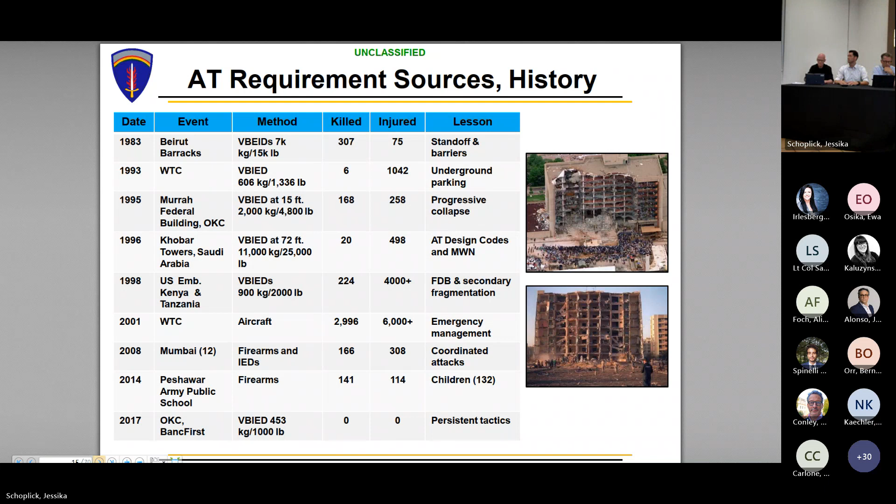Next slide, please. This is then an evolution—first of all, the minimum standards for AT is UFC 4-010-01. Its intent is simply to reduce mass casualties, or minimize the likelihood of a mass casualty event. It's also to standardize the process of identifying what are threats and what are appropriate levels of protection, so that it's standardized across DoD—not subjective to this person and their idea, or that person's idea—to standardize it and make it more economical and effective, not just subject to whoever is involved in the design at that time.

So there's been a long history of this standard since it first came out, starting around 1999, the first kind of version of them. But the big thing we've seen changing throughout is standoff distance.

At first it was just a blanket 25 meters and 45 meters. Some people still remember that or still even think that's the case. But then they changed the standoff distance. For people unfamiliar, standoff distance is the space you need from your building to any roadways or parking, because cars are an easy way to carry very large bombs that can do significant damage to buildings and the people inside.

So standoff distance is a big thing of these standards. It went from the 25-45 blanket requirement to then account for the fact a reinforced concrete wall is stronger than unreinforced masonry, so then accounting for standoff distance based upon your construction material.

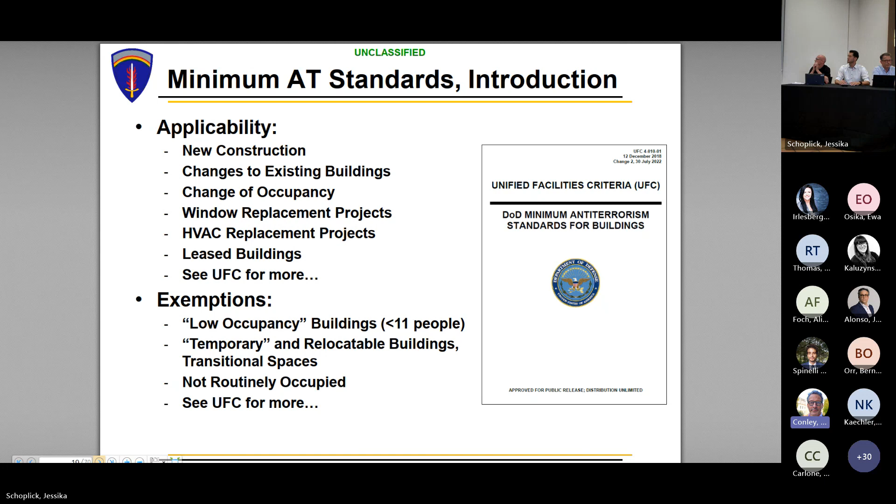But the first step in all this is once you determine that these AT standards are applicable, you have to do a design basis threat. That is from UFC 4-020-01. This is a process I'll cover very briefly later, but basically establishes what are the assets, how important are they, and what are the threats, and how likely are they to attack. So every project that has AT equities, you have to do this.

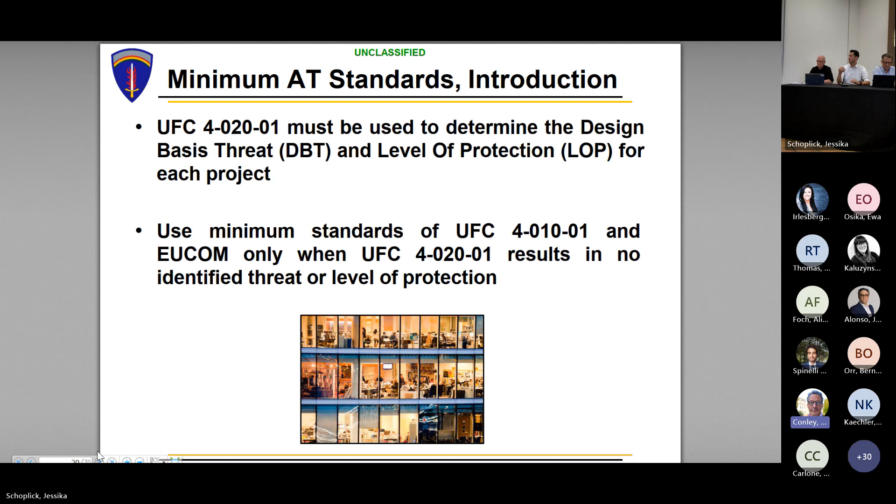If you go through this process and the asset value is very low or the aggressor likelihood is very low, there's a set quantified value for that, but if it's very low, then you don't have to do any special considerations - you just apply the minimum standards. And that's what I'm covering today, those minimum standards. But you always have to first do the design basis threat, and then if it's the minimum standards, that's what you use.

So I wasn't sure whether to present this, but since so many of us were familiar with the old minimum AT standards related to standoff, I think it was maybe valuable to show what actually changed, since we're still living with the impact. Basically, as we said, it eliminated VBID as a minimum threat scenario. The idea was that if a building was actually going to be targeted, then it would be captured in that design basis threat process if it was happening properly, and it would be protected.

But if it's a very insignificant building, it's not going to be targeted. So it only needs to protect against collateral damage, like if the more attractive building down the street was being targeted, this building next to it wouldn't receive collateral damage. That's the reason behind it and the impact.

Some other big changes is that progressive collapse, I'll have a slide on it if you don't know it, but it's no longer required for existing buildings. Only new construction for buildings over 2 stories.

And then there's an Appendix B and C here. Basically that's taking all the content that used to be there for how to do standoff distance, how to make windows and doors that protect against the blast event. All that content is still in the UFC, it's just moved from the minimum standards to those appendixes. And Appendix C has those tables, the standoff tables you might be familiar with - what's the explosive weight, what's the construction material, what is a planning factor for standoff distance.

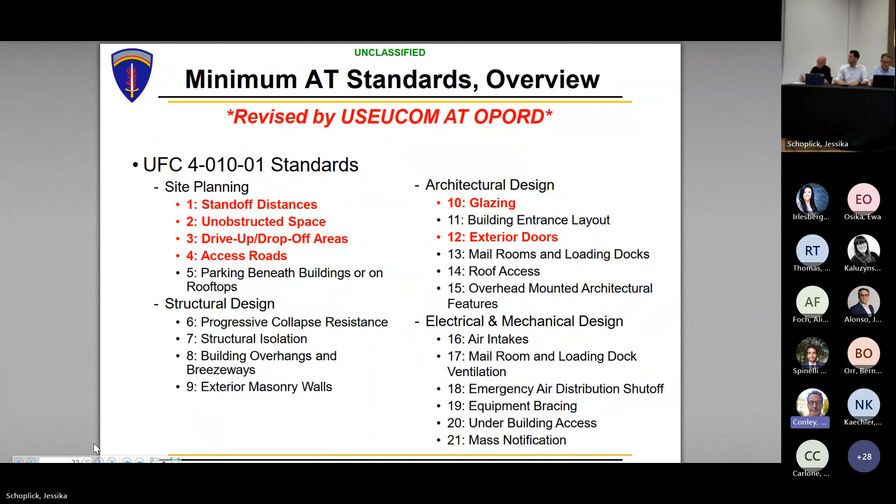Next slide, please. So these are not applicable in Europe, but I'm just showing to show the contrast, the difference. But since the 2018 publication, the UFC alone only requires this basically standoff to be anywhere from 6 meters to 15 meters to your installation perimeter, depending on what's outside that perimeter line, but as little as 6 meters. And pretty much there's no standoff distance required from your buildings to internal roadways or parking. And by internal, I mean within an access controlled installation.

And then there used to be special considerations for if you had an access road, like a DFAC needs to have deliveries coming directly to it, even if that's within standoff. There used to be requirements for how you control that access road. But those restrictions were also then eliminated. Next slide, please.

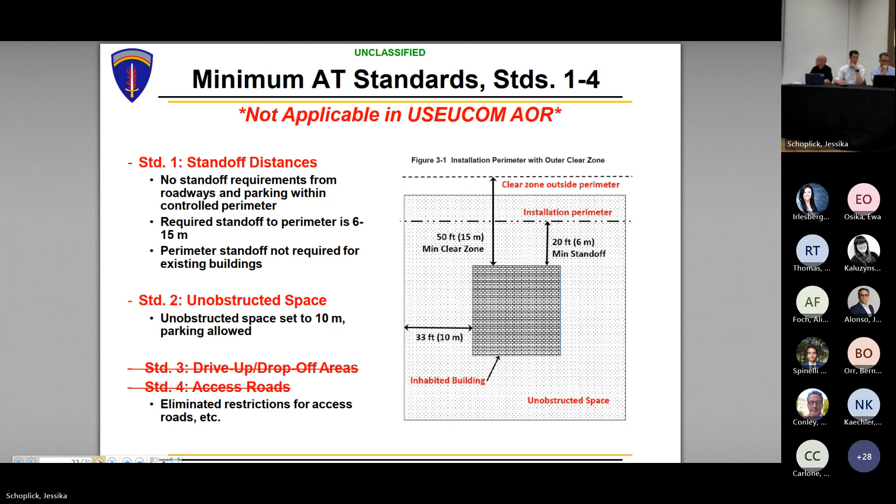It's one off. Okay, so there's a lag. Okay, so then also just like it affected those siting conditions, it also affected some of the materials that protect.

So windows used to have to be specifically designed. With the 2018 change, that just gives a minimum prescription. A 6 millimeter laminated window is enough to give collateral damage protection. If a bomb goes off down the street, your glass will break, but the overpressure there will be so low that just a very small, laminate thin window will reduce some of that flying glass that you see in the bottom left photo. Similar topic for doors - they removed these special design considerations. Next slide.

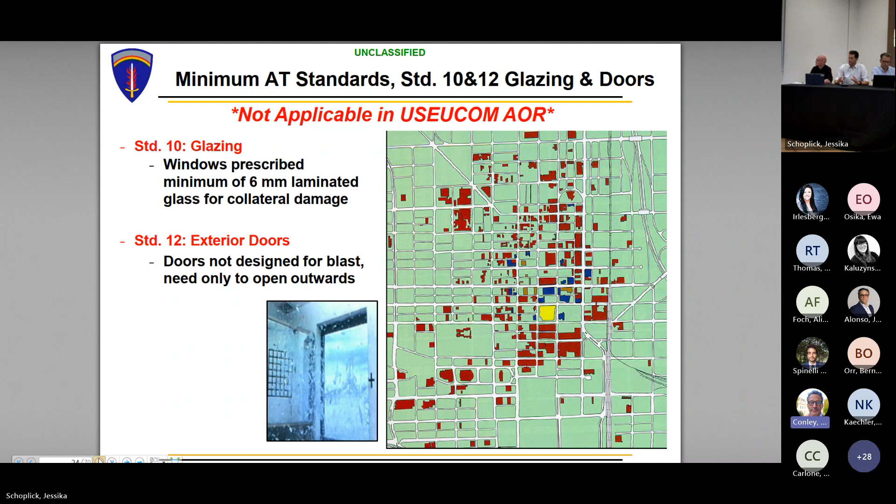Okay, so this is how the EUCOM AT op order modified it. This is just an extract of what's in the op order. I don't want to dwell into it because it's just a lot of boring text. And you see I omitted any explosive weight because it's a bit controlled information. But if you have the need to know and you're working on our projects, we share with you the AT op order and you have those design considerations.

So first of all, the EUCOM AT op order establishes what the threat delivery vehicle is and the size of it, but more importantly, the weight of it, so that if you have barriers, you know what kinetic energy you need to design them to. So it establishes what the weight is, and then it establishes the

explosive weights of that threat. So based upon your access control procedures, how small the thing they're searching for, based upon a building's proximity to the perimeter or to internal roads and parkings, it gives two different explosive weights to design for.

But then the big thing here is designing for that bomb to be either a stationary VBID or moving VBID. Stationary means the person wants to park in a legal parking spot, walk away unnoticed, go on throughout their day, and the VBID goes off and they're unrelated to it. Moving means that if the person has created a VBID, they're happy to give their life or get in trouble in the delivery of it.

They're not going to restrict themselves to legal parking spots. So they will drive up a road that says authorized vehicles only, or they will drive over the curb and get their VBID to their target. So that's the difference between stationary and moving VBID.

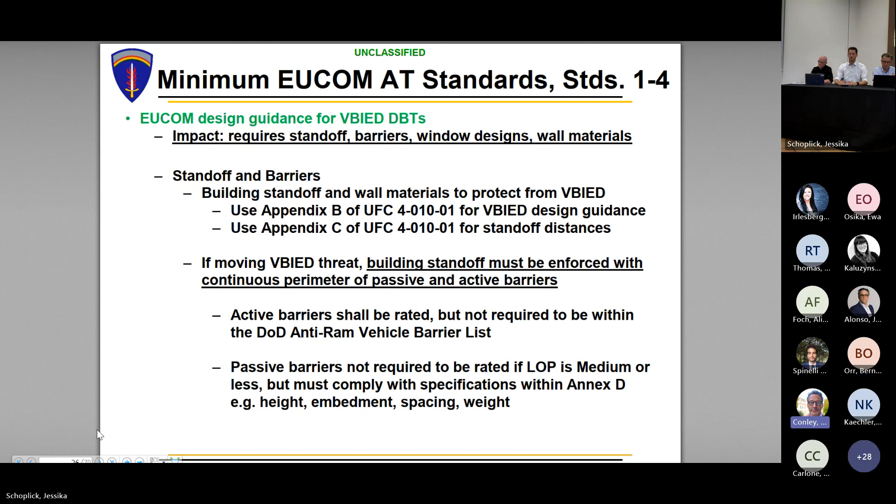They can be rated to the European systems they have here, but they don't need to be on that list. And then the passive barriers, they do not need to be specifically rated. They need to be designed for that expected vehicle and to provide some kind of stopping capability, but they do not need to be certified rated if the building's protection requirement is medium or less. But they must comply with specifications from EUCOM for height, embedment, spacing, or for example weight if you're using things like boulders. Next slide, please.

So 2 different standoff requirements. Your unobstructed space, you can't have any bushes or things where people could conceal IEDs within an area near the building. So that whole distance of your standoff distance to your parking, say it's 16 meters, that's called your unobstructed space, and it needs to be clear of things to hide IEDs.

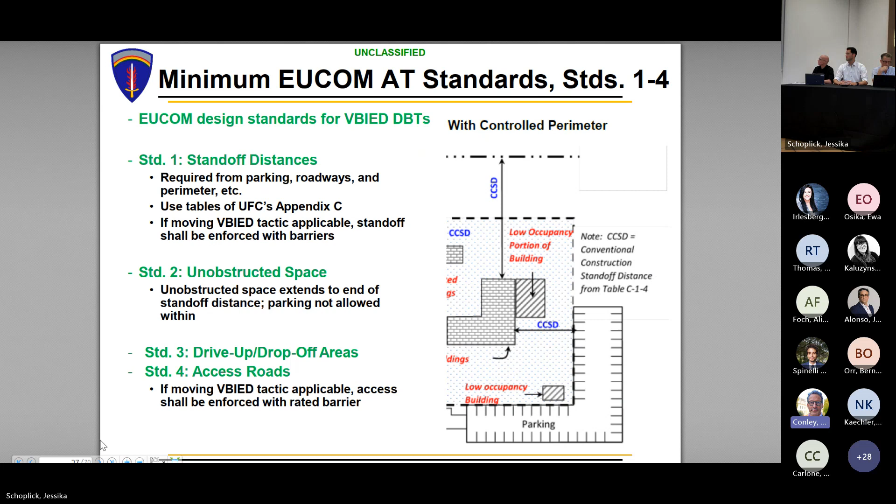And then also, if you have access roads to that building going inside your standoff distance, there are specific requirements - you need to enforce it with barriers, active barriers.

This is showing one of those standoff tables from Appendix C I was mentioning. So as an example, if it's unreinforced European clay masonry, which is common here, non-load bearing wall against a 25 kilogram IED, by this table you might only need 7 meters of standoff distance from that wall to your parking to provide a low level of protection.

This is just a planning guide. Actually, if you have a lot of windows and less wall area, responding to the load, you might need more, but it's a planning guide. Regardless, you see 7 meters there, but yeah, the weakest link controls.

You see the windows down there, a typical window is going to require 15 meters. So it's not just the walls, also account for the windows, but in theater, the windows we can get from manufacturers and the analysis that EUCOM's team has done, usually 16 meters is the minimum distance to have an economical window. That's a good rule of thumb to keep in mind - 16 meters when you're siting buildings to any roadways or parking.

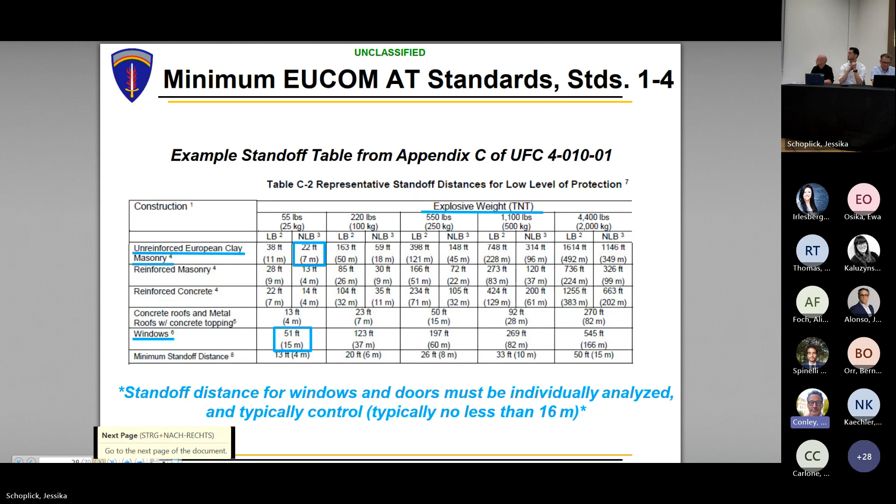So we had to account for standoff, wall materials, and then windows. We cannot use the prescribed window within the UFC, that 6 millimeter laminate window. Windows need to be individually designed based upon the standoff provided and the threat size IED, in order to fail in one of these safe blue or green zones, depending on your level of protection. That's basically showing the projection of glass throughout the room and the different hazards. But our windows are specifically designed, not using the prescription of the UFC.

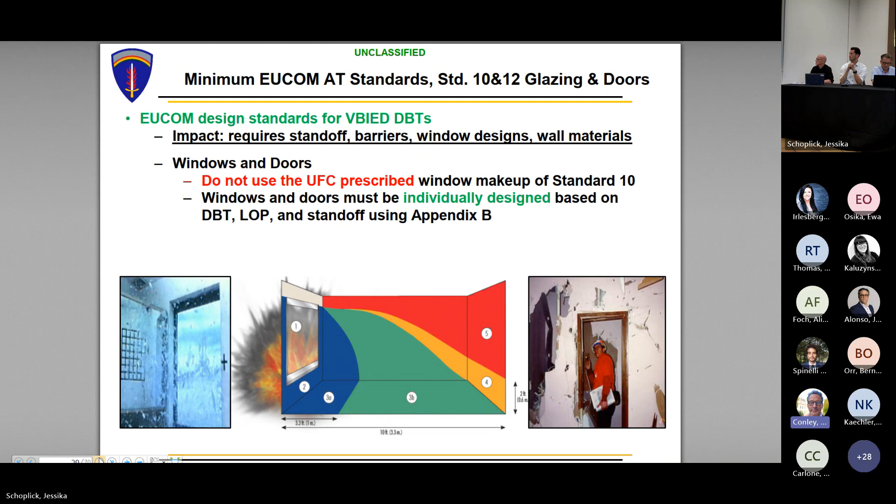This is just showing what a laminate window is, in case you don't know. So on the left is a typical insulated glass unit window, 2 panes, and the inner pane has a laminate there. So if the pane fails, kind of like a car windshield, the window breaks, but all the glass fragment is held together, bonded on that laminate, and not projected into the room.

This middle image is showing the typical European window that opens, but then also tilts, because these windows are often in open position. EUCOM also requires these windows to have both the inner pane as typical and the outer pane made of laminate glass, but these are available from local manufacturers.

It's not just the laminate that's important, but that laminate is what's holding the window in the frame, so it has specific anchoring requirements into the frame itself. But then the frame also has certain anchoring requirements, you see in the bottom right, into the wall. All that load has to be passed into the structure. And then is the wall even strong enough to absorb that load if it's weak old masonry?

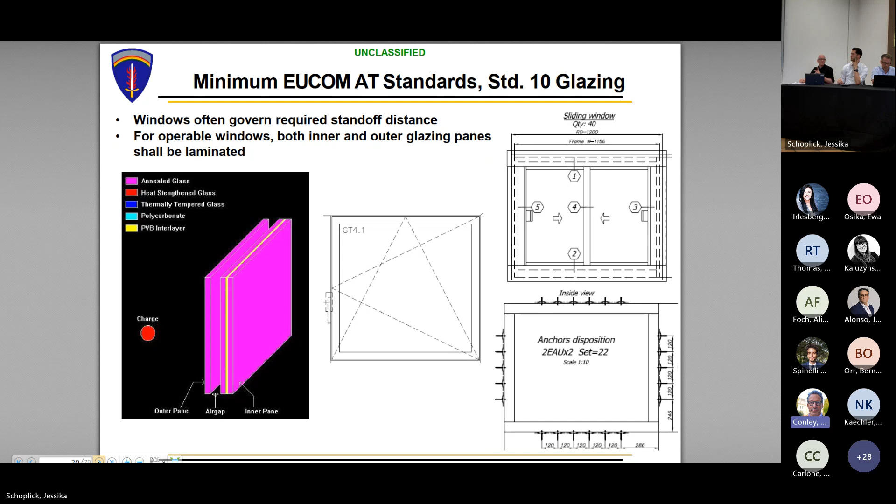One added note - the tilt windows are also tested in tilt position. So it's not only that the exterior pane is laminated, also the mechanism that holds the window in the tilt position is tested for that load.

Okay, so this is maybe the EUCOM specific considerations shown in a real world application. I don't have a pointer, but we can see there that the building to any roadways and parking has this standoff distance of green space and unobstructed space, no big things there to conceal an IED. And then we do see an access road that goes to the front of it, but what you can't see on the image is that there are active barriers there controlling the access as needed. And then the perimeter you also cannot see, but around where the parking is, where you don't have the access lane, there are stationary passive barriers enforcing that standoff distance, so someone can't pass through there. And then glazing exterior doors are also captured.

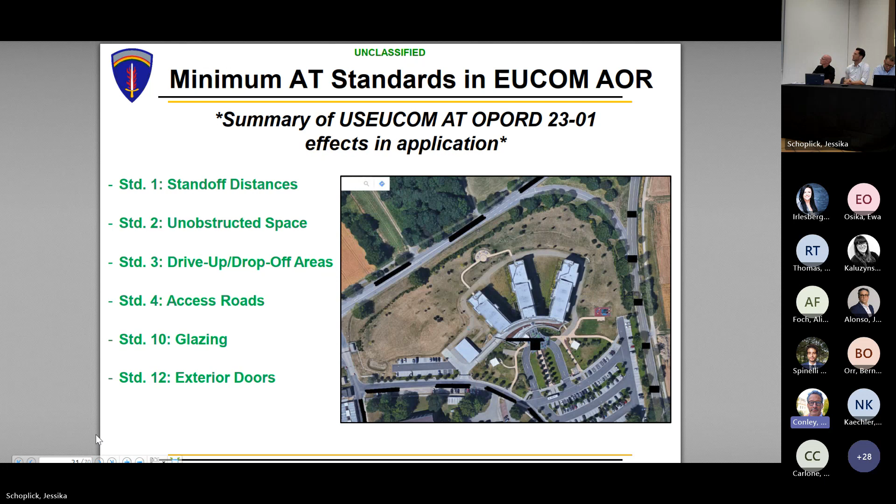So again, a summary of all of the standards, all 21 of them, and I've already given you a good run through of the 6 that were revised by the EUCOM AT op order. The green ones are changed and different. Since this might be new content for all of you, I'll go through some quickly, just bullet by bullet, not individual slides, what these different standards are.

Let's look at number 5 on the left. You can't park beneath buildings or on rooftops, because obviously it's just the easy way to introduce an IED there.

Progressive collapse resistance: new buildings over 2 stories still require design to resist progressive collapse. I'll have a slide for that. There's also consideration for structural isolation, building overhangs and breezeways - you should not have them. They're a nice architectural feature, but they can capture and even amplify explosive loading. If you have exterior masonry walls, there are minimum reinforcement requirements so they don't fail hazardously. We already talked about glazing.

Number 11, building entrance layout - let me add a note on that first. The exterior masonry wall requirement is a US requirement from the UFC, requiring reinforced masonry like concrete masonry unit, which isn't available here in Europe. That's why we normally fall back on reinforced concrete walls here.

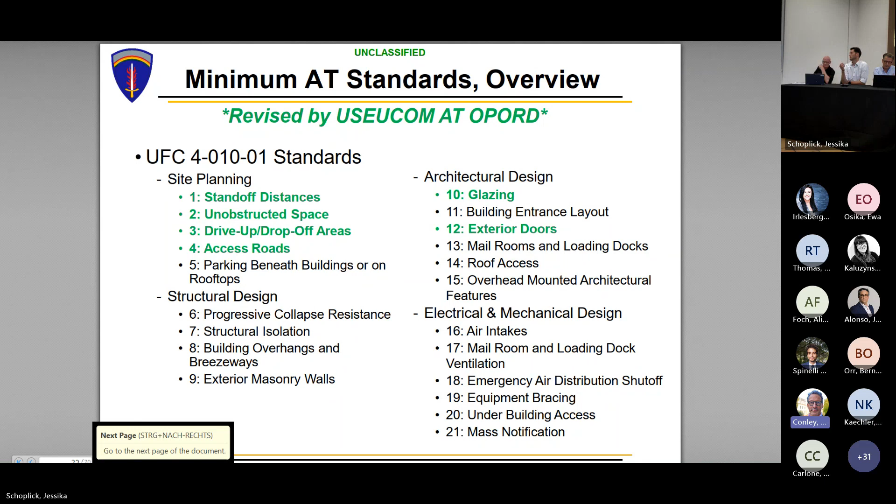A bit more detail on progressive collapse, for those who may not know - it's an event where you have disproportionate damage. One member fails, but you get overloading and failure resulting in much higher damage. Most of us recognize the building in Oklahoma City was the big lesson learned from this. It's required for buildings 3 stories and higher.

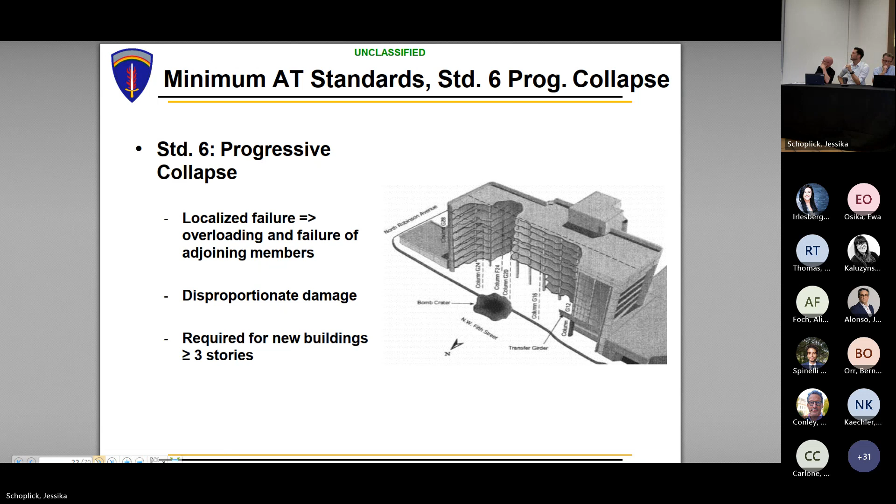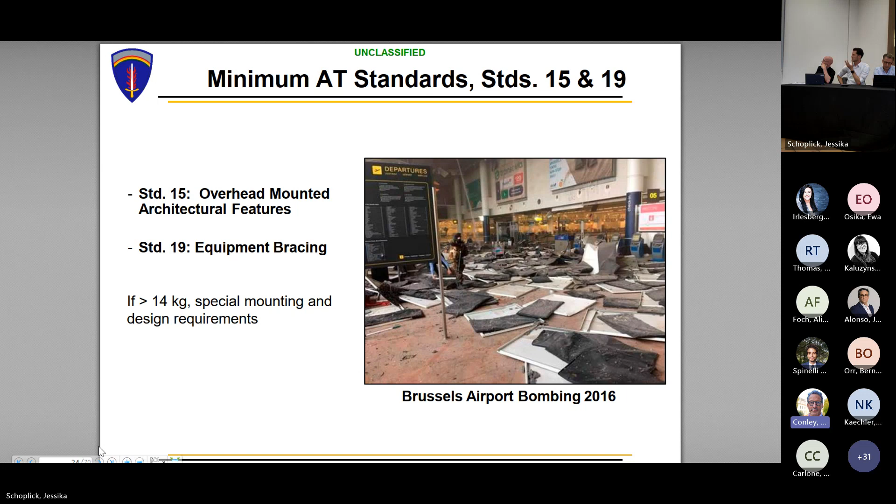This is the EUCOM AT op order again - I already went through the design changes to it, how they changed the UFC. The only thing I'd like to highlight is that all installations under EUCOM are required to have at least one engineer trained in security engineering. So if you're doing a project at USAG Ansbach, there should be at least one knowledgeable person on these standards engaged with your project, helping with design reviews. For Ansbach, I think we actually had 4 people there today.

One thing helpful for the AEs to know is the difference between the facility design basis threat, which we'll talk about later, and a local or installation DBT. The facility design basis threat is a document governed by these UFCs - you do it once in the planning phase of a project, and it exists for that building's lifetime as is. The local DBT is an annual live capture of perceived threats that affects how the garrison plans its own security. That document should feed the facility design basis threat when you're doing it, but they're not the same - you can't use one for the other.

Applying the minimum standards to new construction can be more straightforward, but to existing construction there can be a lot of gray areas and complications. EUCOM, through the help of USACE, developed implementing guidance for things like building additions. Of that addition, what has to incorporate AT standards? What has to incorporate the new barrier systems? Is it just the addition, or the full building?

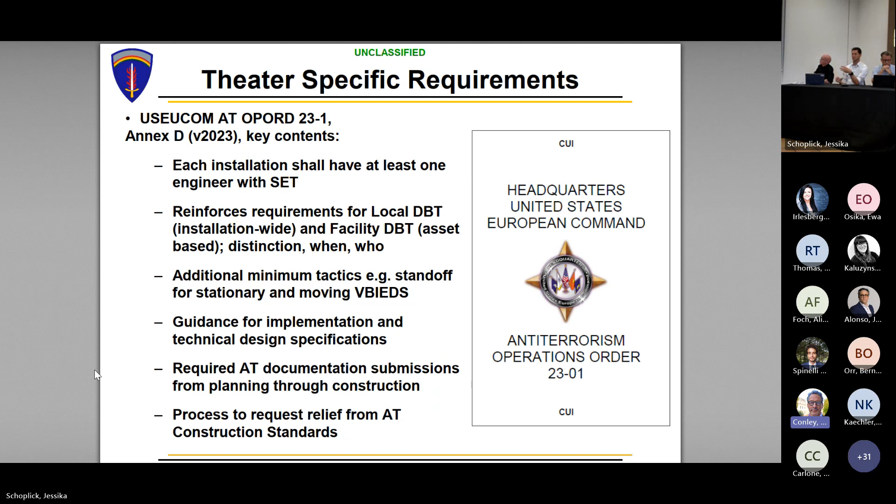Especially in Europe, where our bases are quite constrained with space, if we're renovating a building that has had parking and roadways next to it throughout its whole history, we are allowed, when triggering these requirements to provide the level of protection, to eliminate parking, but not necessarily allowed to eliminate roadways. So there's quite a few detailed nuances in the standards to read for how to apply in these unique situations.

Also, some guidance if not new construction, but just mitigation type things, like using retention film or blast curtains, and specific ballistic protection requirements for any guard booth facilities, like at an access control point. That's above the minimum standards.

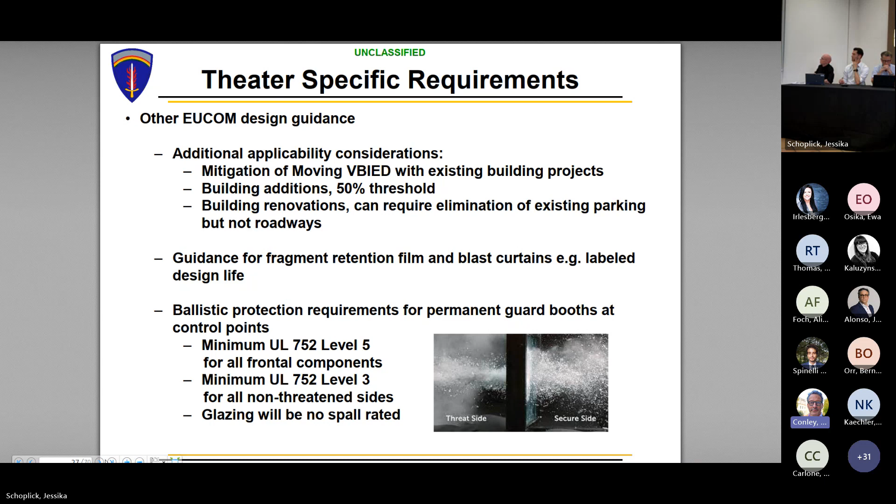Just know that there are some other standards out there. The Army Europe regulation doesn't really add too many new procedures, it's more of a user guide to the anti-terrorism officers about how to manage all these different standards. It does give a theory: instead of trying to have barriers around every building, let's be smart from the area development plans, create pedestrian zones, and have a holistic barrier plan, not just around every individual building. There's a UFC on access control points, but the Army also has its own standard for it, so that's relevant for you to know exists and to reference.

Schools are big projects over here. DODEA has its own similar standard, you recognize the number 41001, with 36 standards of physical security and anti-terrorism criteria. Some are very similar to the AT UFC, but some are uniquely their own. So know these exist and reference them when relevant for your projects.

This is the design basis threat. I'm going to go through these fast because all I want you to know is you've probably heard the term. It's the first step as soon as a project comes to conception and starts planning, because it establishes what's the appropriate threat and what's the appropriate level of protection. That gets captured in your planning documents, and it affects the funding you get. These need to happen at the beginning, and you should be getting these from the installation.

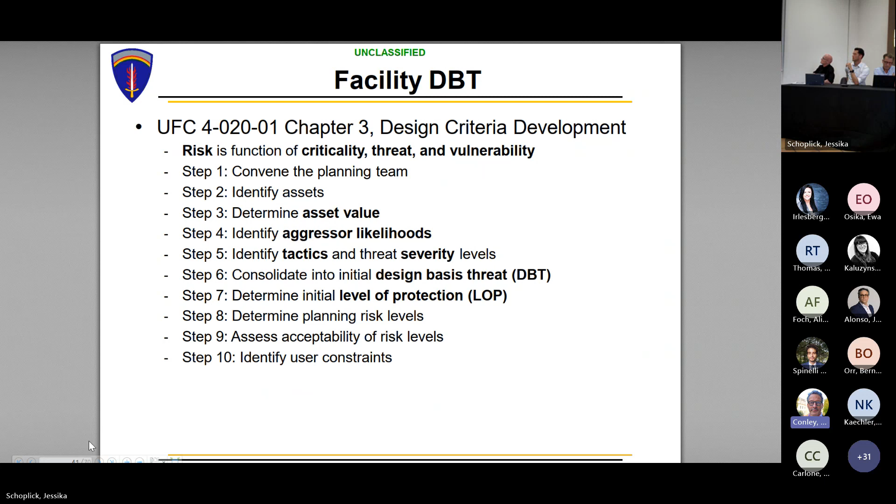These are the steps, which I kind of went through verbally. Basically, first you're establishing what your assets are in the building and determining how important they are. At the end, on the right, you get your asset value. There are going to be many assets within a building - this is just one example - and that asset value basically drives what your level of protection will be. This one is pretty high, so you're going to have a higher level of protection, which I'll explain later.

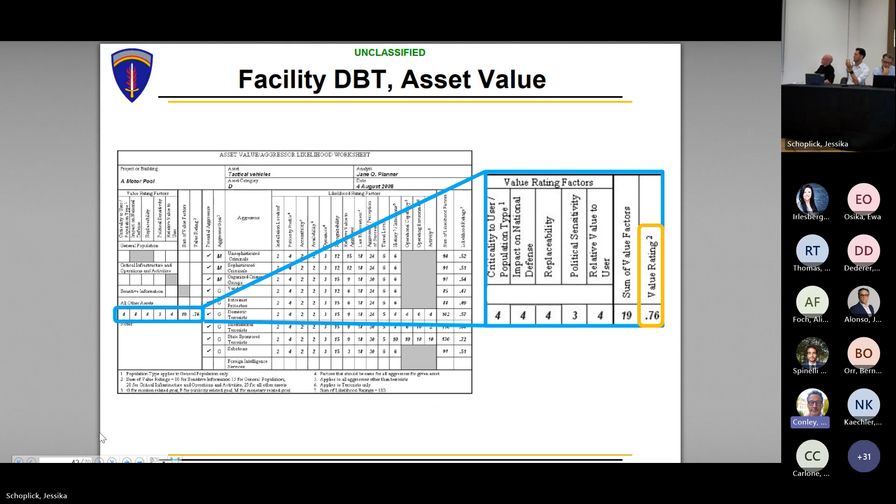For example, if a building has a VBIED threat, maybe it's okay for the building to be very damaged, like the top photo, as long as there's not a mass casualty event - maybe some local injuries, but the building hasn't collapsed and there's no mass casualties. Or, like the bottom right, you'll see way less damage - maybe people shouldn't even leave their desk, they need to keep working through any kind of event. That's the difference between a low level of protection and a high level of protection, based on the asset value that dictates how your building will respond to whatever threat you have.

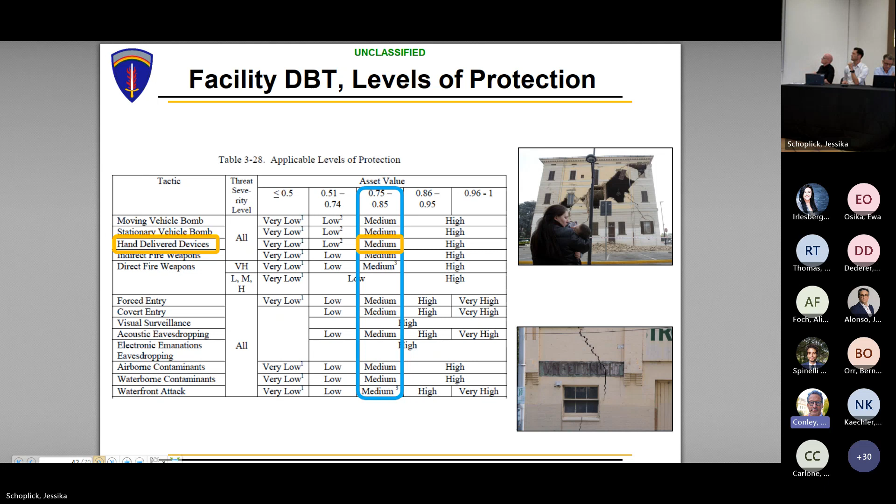This even defines what a medium level of protection is, as I illustrated - how the building performs, how the glass performs, and the types of human injuries that can be expected.

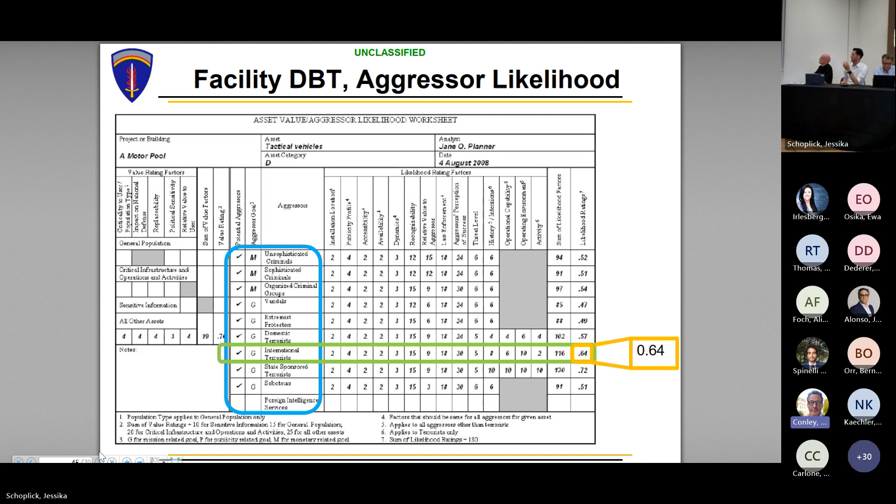Once you figure out how important the asset is and what kind of level of protection it needs, then you look at all the aggressors. So in the blue box, who are all the aggressors, and how likely are they to attack based upon their operational capabilities and the availability of that specific target? Then you get your aggressor likelihood on the right, again, how likely are they to attack.

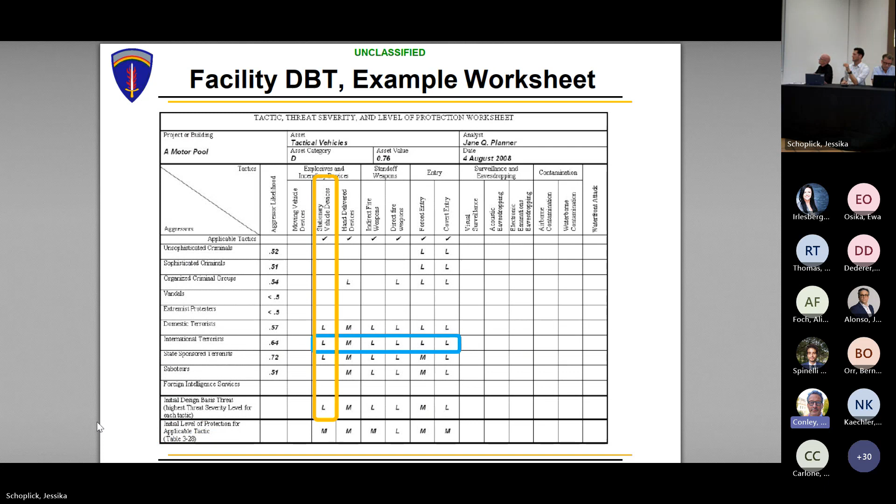Then you go through this other table and basically the highest controls, and you end up with all of these threat tactics. So like I have stationary VBIED highlighted in yellow, the highest controls, which anyway is only L's, so then your design basis threat is low against it. You don't need to know it, just know this is the process for the end result, which we give you.

But yeah, what is a low design basis threat? Well, there's another table within that UFC that explains what a low is, and in this, there it is.

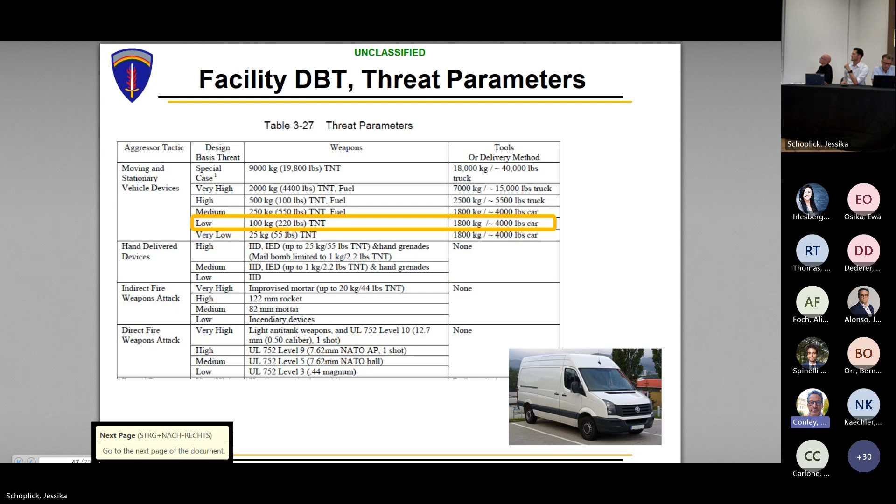Okay, so that UFC 4-020-01 that goes through what all our threats and protections are has not been updated since 2008. Obviously, there's new threats out there. This is just to illustrate one we're all well aware of now: small UAVs, commercial UAVs weaponized with just a 40 millimeter grenade, and the damage it can do.

This is not from this specific threat, but a similar type thing: a 20 centimeter concrete roof slab representative. So significant hazards that are not captured on protection documents. The point is, when you're doing these design basis threat assessments and capturing your threats, you can incorporate your own things in there as well.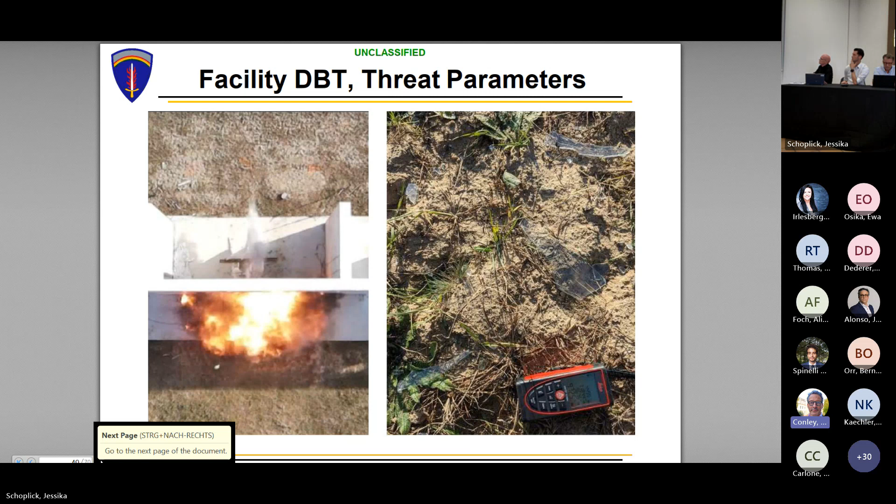Chapter 3 does the process for how to do the design basis threat. Chapter 4 then tells you how to protect against it. So for example, if you do the process and a direct fire weapon was identified as a threat, if your required level of protection is low, all you have to do is block the sight lines. So that's things like orienting your doorways to not face the perimeter, or having some tint on the windows so people can't directly target within a building. But if it's a high level of protection, you actually need to harden all your building elements, the walls and windows, and you might need this type of 4-inch concrete to resist that type of bullet.

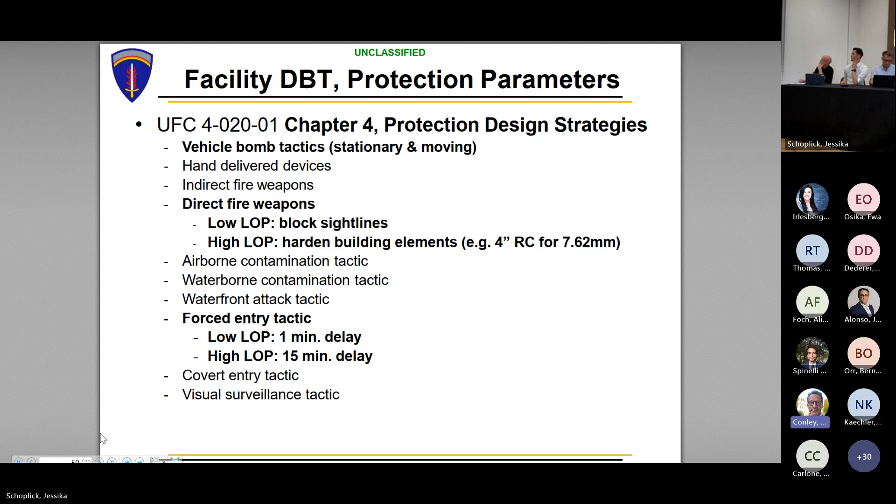This is just showing how AT is captured through the whole design life. So in planning, that's when you do the design basis threat, and then that design basis threat goes into your planning document. For example, for Milcon, your DD 1391. So that's all captured in the planning phase.

Then in design, of course, the designer takes it and incorporates it into the design. People are reviewing the design, making sure it's being designed as was planned and required, and then staying on top of construction so it's properly built.

Similarly, area development plans are also an important time for AT, because there you get these holistic site concepts where if a building's going to require a lot of deliveries, you don't put it on the backside of the installation where sewage trucks or these unvetted trucks might need to drive past barracks every day. Put those buildings closer to the access control point. And also, you can establish what your general level of protection is for typical buildings inside to help you with siting.

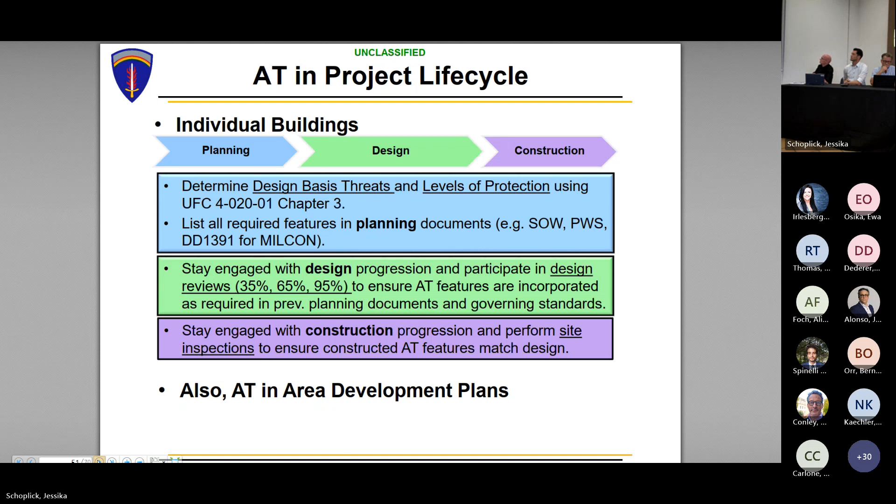So these are some of the roles. As your AEs are working with the garrison staff, know that every installation usually has an anti-terrorism officer, and they're the ones we hold directly responsible for making sure these get correctly incorporated. But they're usually not from an engineer background. They've been to security engineering training and have some basic awareness, but they might not even know how to read engineering drawings. Still, there's someone you need to know.

Same thing applies to the physical security officer for things like the fences. Anti-terrorism covers the standoff distance, all those things we talked about. But the physical security officer handles things like perimeter security, locks and cameras. That's the kind of person you talk to for that. There's usually a chief of protection that also has some type of role with them. And every DPW engineer has to have a security engineering trained person, like an actual engineer.

Other relationships include the higher headquarters, like within the staff, who also have input because they're responsible for force protection too. Someone like Fifth Corps, and also our office at U.S. Army Europe and Africa. Some other major players are the European USACE district, which has structural engineers involved in the planning and design reviews, and then you all, the AEs, who are capturing those design requirements into our projects.

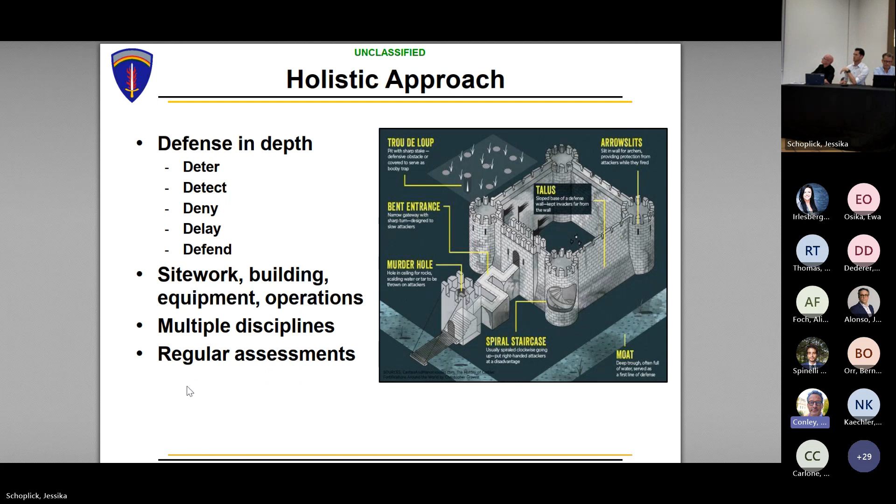Next slide, please. I'll skip this for sake of time, but basically it's just saying it's a lot of different people involved in holistic design. You can click on this later when it's just showing some resources for understanding what the threat might be, but also some reference manuals.

And this is the SharePoint page. If you have a CAC, you can access it. If not, email me and we'll figure it out. You can come to this site for all the references like the AT op order or software to help you do the design basis threat, news about upcoming trainings, and to find out who different points of contact are at USAG Ansbach, who just had security engineering training and can be your contact.

Next slide, please. All right, so I went over the requirement sources in general, what the minimum standards are, how they're modified by Europe, and how our minimum standards are additional, what the design basis threat is, and then some of the different roles and responsibilities for AT throughout the chain of command.

Next slide, please. All right, so this is my information. Feel free to contact me. And I have one question as I transition over.

Did anyone plan to eat lunch at the DFAC? No? Okay, then you don't need to worry so much about time then. So 20 minutes is enough for you, Akam? Absolutely. Yeah. Okay. You want to answer a question in your presentation first?

Does anyone have any questions on the content I put forth?

Sharice asked: do you see any difference between the services in the way this is applied, Army, Air Force, the way they do the DBT? The requirements here are not U.S. Army Europe's requirements, they're not Army requirements. They're from DoD and EUCOM, so that is what needs to be done. I'm doing my best, and all of our staff at the theater is doing it that way. But yes, I'm aware that sometimes it seems other services are not doing it, and these things should be captured because EUCOM comes and audits us. They want to see what projects have AT equities, and there's a lot of other documentation they require from us. So they should be getting caught in their own inspection programs when EUCOM comes to them, and things should be corrected. But I think we're doing perhaps a better job than some of the other services on it.

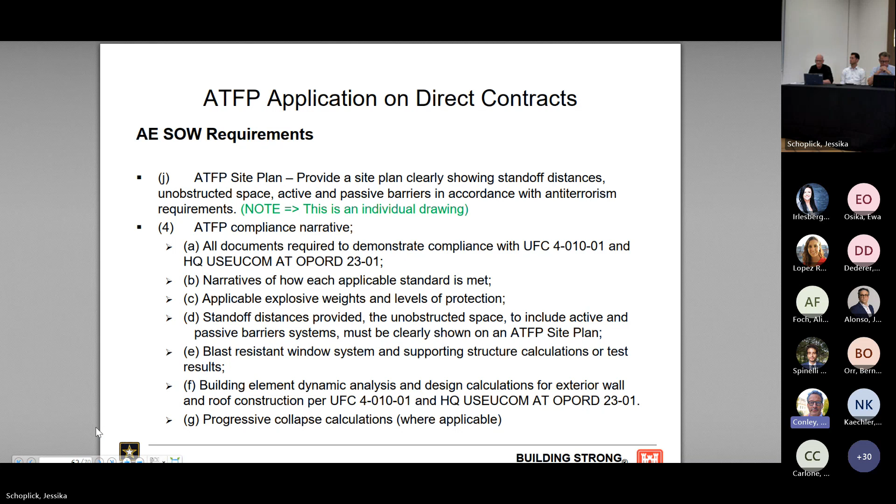From my perspective, it's also really useful - I don't know what the decision is to do it like that, but especially for ATOs or people less familiar with reading engineering drawings, having one document where it's all located, not having to go through different site plans or a big table of contents, is very helpful.

So this is not necessarily a construction document, so the contractor would not necessarily need this. This is for the ATO, for USACE, to make sure it's all there. And we have this requirement not only on direct projects, but also on indirect projects through the German government.

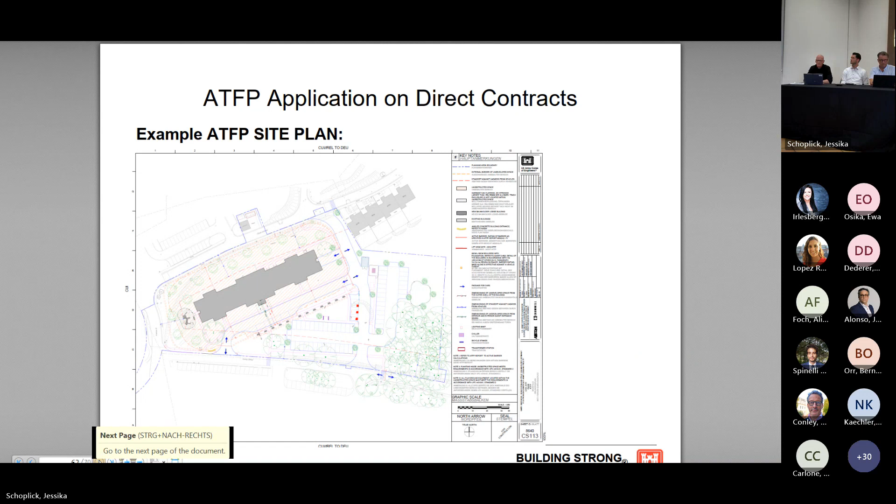And if something happens between the charrette and the concept design, there's always a point of contact from our team in the charrette who is responsible for ATFP. So please work with us, ask us, contact us, discuss issues. If something is not clear from the charrette, it's better to discuss it first before it comes to the 35% design, and we review it and wonder where all the agreements have gone, alright?

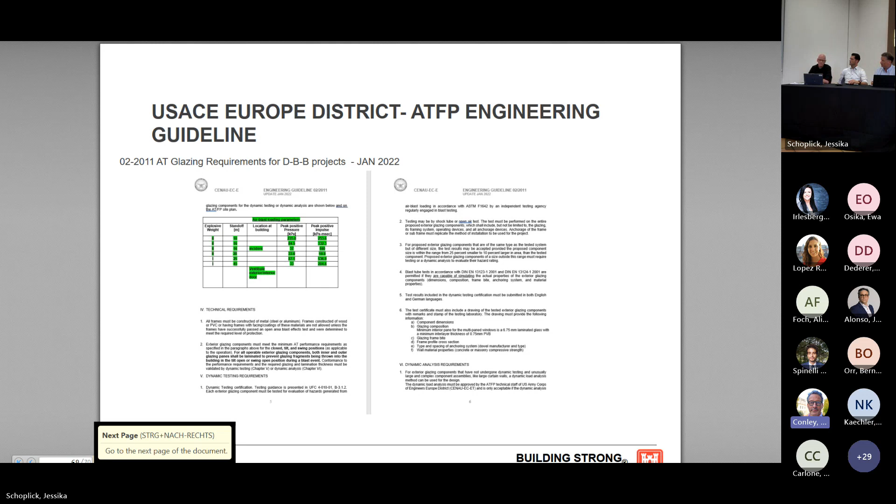I think we are providing that for projects also. It's very useful. These are our ATFP POCs, myself and Dan Rosha. He's our lead structural engineer, SME, working in the structural civil section. And I think that's all I had.

What I did have, I have a sample from the ATFP narrative, if you want to share that. Can I ask one question? The spec language you just showed, and maybe the site plan, can we share that document as its own attachment along with the slides? Yeah, I can send that to you. Yeah, we'll make that available.

I just had one comment, or did you want to go through this, Bucky? Go ahead. We talked about the ATFP narrative, and I just want to show how it looks. Again, I copied this from your project. At the beginning it talks about the background, but scrolling down, it addresses each standard Scott pointed out in his presentation and how it's addressed in this project.

That's a pretty good sample, and that's the expectation we have, and it's not just subjectivity, it's required. Well, that's the narrative, right? That's what I put this together for. This was something required in the UFC before 2018, and we just kept it because we think it's a good thing to do.